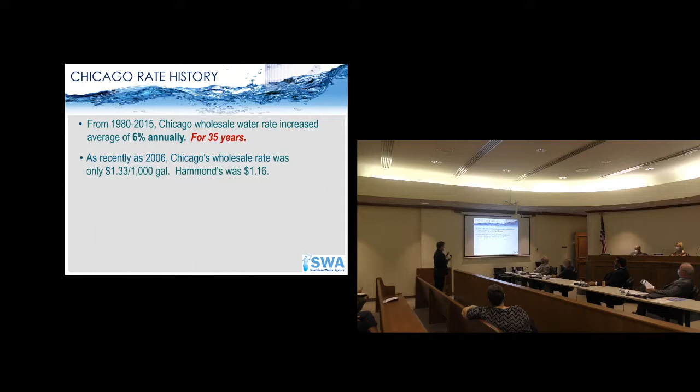For a 35-year period, Chicago's rates increased an average of 6% per year from 1980 to 2015. As recently as 2006, it was only $1.33. Hammond's was only $1.16 at that time per 1,000 gallons. Chicago's rates, in fact, just increased again yesterday. As of June 1st, they are now $4.08. So they've more than tripled in the last 14 years.

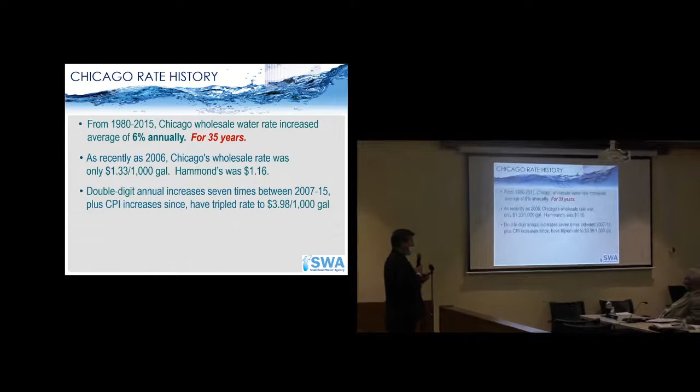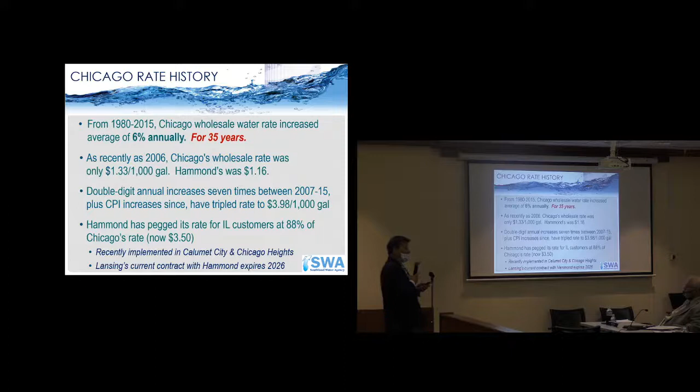Hammond has very publicly pegged its rate arbitrarily to 88% of Chicago's rate. Now Lansing, by virtue of your existing contract, which I believe has been in place since 2006, has got a lower rate structure than that. However, Hammond's practice has been over the past several years with both Chicago Heights and Calumet City to increase the rate dramatically all at once to match 88% of Chicago.

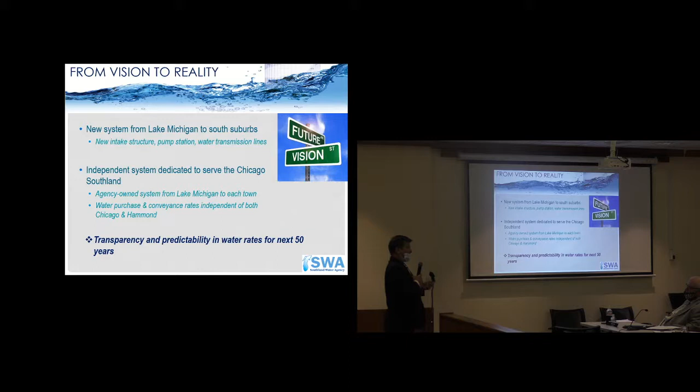Your current contract expires in 2026. As Mayor DeGraff indicated, we're looking to build a completely independent system. It would be a brand new system from Lake Michigan all the way to the Illinois state line. Somewhere on the Illinois side, we would build a water treatment facility and distribute all the finished water to Illinois communities. Everything would be completely independent of Chicago, completely independent of Hammond.

And the most important thing is the transparency and the predictability of water rates for the next 50 years. Don has already gone through all these details, so I'm going to just fly through this.

We have an agreement for a Lake Michigan access site. We've developed a public-private partnership with a group in Northwest Indiana that has property right on Lake Michigan. We've got a signed pre-development agreement for them to front the cost to build the line, the pumping station, and the intake — basically a $300 million investment to get the water to Illinois.

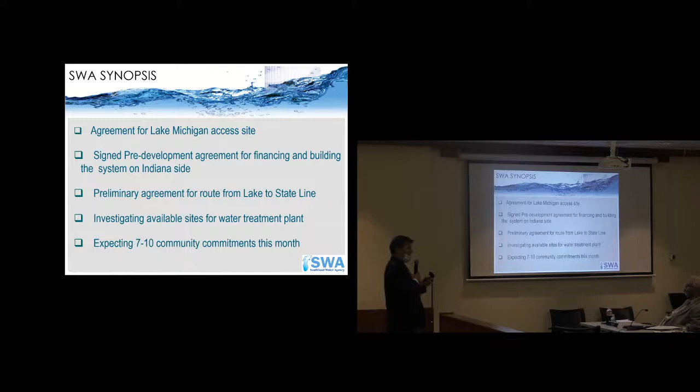We're currently investigating feasible and available sites for our water treatment facility. We do have one or two that are rising to the top of that analysis right now. As Don mentioned, we're looking at 7 to 10 other community commitments during the month of June. There are several that are already scheduled in similar meetings just as we're in right now.

The end game is that we have developed a water supply contract, and we are putting it in writing at this time that any early adopter would have initial water rates guaranteed to be at least 3% lower than what their current supplier will charge at the time that our system becomes operational, which we're estimating to be about 8 years from now, 2028. At that point, a fixed rate would be guaranteed for the first 10 years thereafter. And then, for the entire length of the 50-year water contract, they would never rise more than 2% in any given year from year 11 through year 50.

There's deep discounts available for early adopters. I'm going to get into that a little bit later. But one of the reasons that I believe the charter members, including Mayor DeGraff, are so excited about this are the potential economic development advantages, the ability to finally get a win for the Chicago Southland.

Our geography is a huge advantage. Communities in DuPage County don't have the opportunity to go all the way to the lake very easily. Even all the way up in the northwest suburbs of Schaumburg, they're beholden to however high Chicago is going to continue to increase the rates going forward. We have a golden opportunity here in the south suburbs.

What communities will be able to do at the local level is up to each individual community. The wholesale water rate will be significantly lower over time than what other communities face. Communities will have the option with their own individual rates whether to pass all of that savings on to their constituents, or maybe pass along part of it so that they're still lower than most of the areas around it, but use that gap of lower cost with additional revenue to help fund their own individual water system infrastructure for the next century.

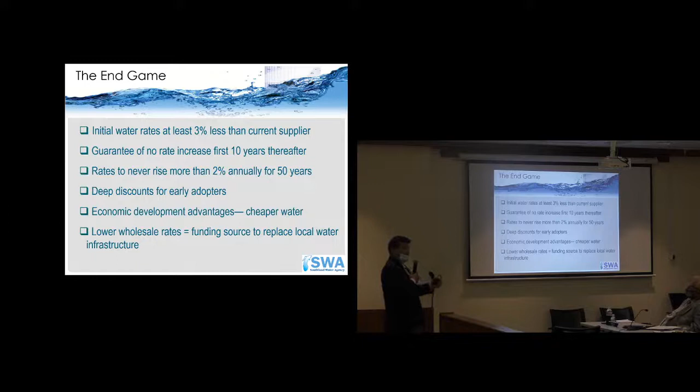In terms of a lot of the water systems approaching 60, 80, 100 years old, these systems are going to need to be replaced. This is going to be a viable funding source to do that.

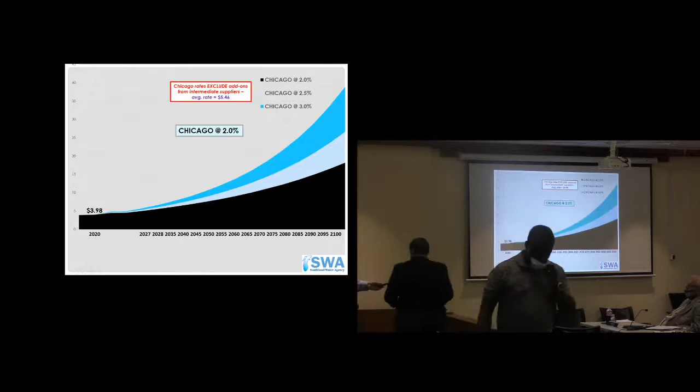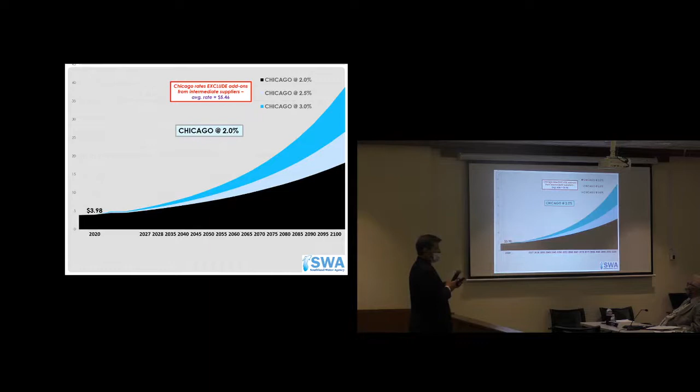398 is where we are in 2020. These graphs show the black area representing Chicago's rate going up just 2% over the next 50 years, and what those rates would turn out to be. By 2027, that'll be at 466, and it's at 408 starting yesterday. The turquoise numbers show Chicago at 3% going forward over the next several decades. We know from history it's averaged 6%, so we believe this is an extremely conservative model.

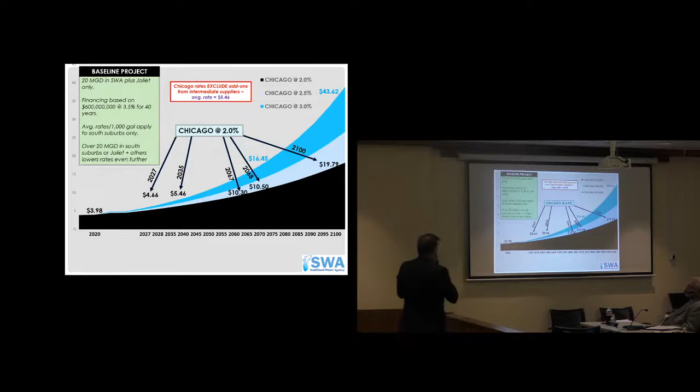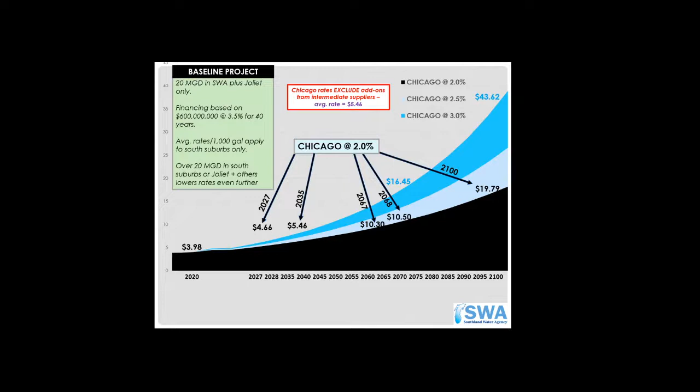Just from a baseline project, looking at this from a regional standpoint, we were able to get enough communities to reach a threshold of 20 million gallons per day in the south suburbs. We believe that's enough to allow us to partner with Joliet, which is also looking at building a brand new system for Lake Michigan water, saving even further. So we're looking at a baseline project based on $600 million. If that occurs over a 40-year financing period, the numbers in red show how much lower these numbers will be over time, particularly once the 40-year financing is paid off.

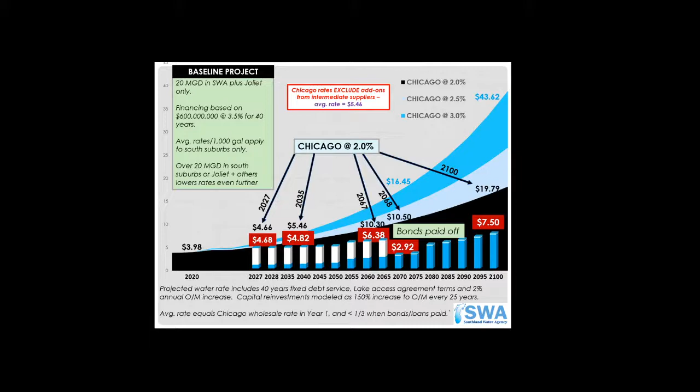There are numerous communities that aren't situated quite as close to the lake or to the direct supply—communities like Country Club Hills or Matteson, who buy their water from Oak Lawn, who buys it from Chicago. By the time it gets all the way down to them, they're paying nearly $6 per thousand today. Overall, in the Chicago suburbs, the average wholesale rate today is $5.46. We know, on average, we're going to be significantly lower than that.

This is the target markets we're looking at. We've got some color coding here because over time, communities have been grouped in different ways, partly dealing with who their current water suppliers are and how it's set up. But there's a target market here of at least 50 or 60 million gallons a day just here in the Southland.

The newest thing that's happened over these last 2 or 3 years—I'm not sure how many followed what's going on in Joliet—but they are still on well water out there, along with many of the communities that surround Joliet. The aquifer is drying up, and the Illinois State Water Survey has determined that by the year 2030, only 10 years from now, they will not have enough water to meet their peak demand from that aquifer. They and many of the other high-growth communities around there face the same issue.

So Joliet embarked on a $1 million engineering study over the last couple of years. Just at the first of this year, their city council decided they're going to go to Lake Michigan water after looking at the Kankakee River and other options. Joliet alone projects to 24 million gallons a day during the design timeframe they're looking at.

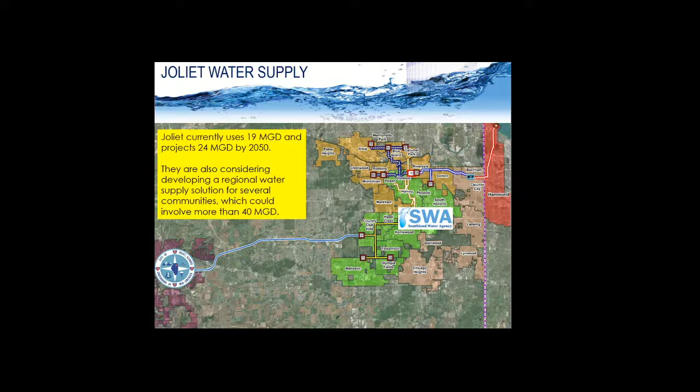By partnering with them, the infrastructure it would take to get at least part of the way there could be shared by that many more municipalities, creating an amazing economy of scale for both the south suburbs and Joliet, along with whoever else they may partner with out here.

As I mentioned, we've got an executed pre-development contract with a group in Indiana. In fact, we've got our status meeting with them tomorrow morning. We'll be meeting with them for a couple hours.

The agency has executed a contract with Robinson to move forward with a facilities planning report, which is going to be used for a funding application later this summer. We're also partnered with a couple other engineering firms that are much larger than Robinson as part of this effort. And we also have a water supply contract that I believe we handed out last week in the board packets that communities are considering at this time.

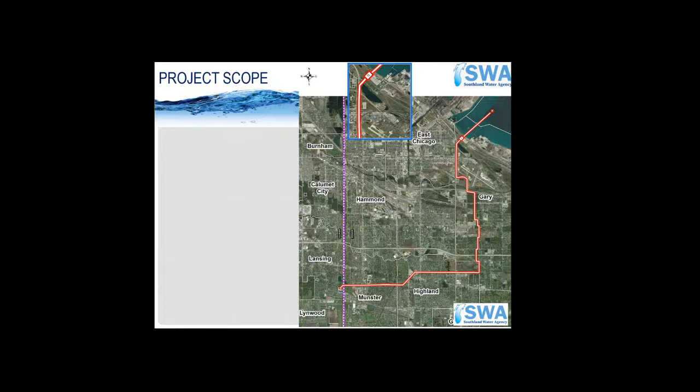Ultimately, the route would start near Buffington Harbor, which is where the Majestic Star Casino currently is in Gary. That casino site is going to be no longer at that location. They're building the land-based site off the Borman Expressway. So by this time next year, the riverboat that's there won't be there.

We've got a deal that allows us a 3-acre parcel in which to build a pump station. We've got a 99-year lease for that deal, with all of the terms essentially worked out already. There would be an intake into the lake about 2 miles into the lake, drawing the water to this big pump station, and then it would go along this route. We've got the route, and basically have City of Gary approvals on the preliminary route.

So we keep hitting the wrong button, I'm sorry.

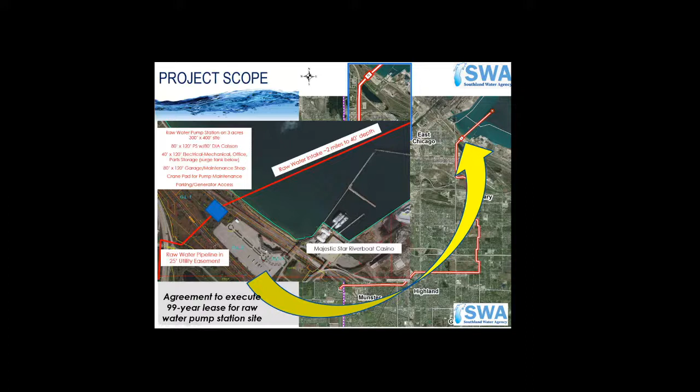There we go. And ultimately get it to the state line, which may very well end up right here in Lansing, depending on how the final engineering works out.

So from a schedule standpoint, this year we're basically working on getting all of the contractual agreements in place with Southern Cook County customers. We're negotiating with Joliet. In fact, we've got a meeting with them coming up again in about 2 weeks. We're going to be finalizing project scope and facilities planning report, funding applications, and ultimately identifying all property acquisitions that are going to be needed.

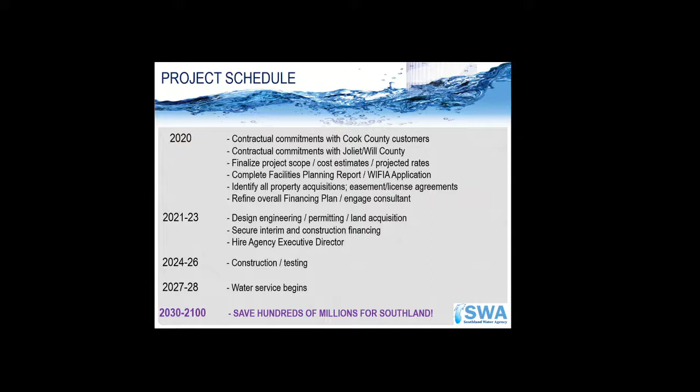Design engineering, permitting, and land acquisition is planned for 21 through 23, as well as hiring an executive director for the agency. Construction and testing are envisioned between 24 and 26. Water service would begin between 27 and 28. That's the tentative plan. And then over the next 70 years, the plan is to literally save hundreds of millions of dollars collectively for the Chicago Southland.

I mentioned earlier, Indiana Infrastructure is committed to finance the construction to the state line. At that point, we'll have a contract where the agency will then purchase the infrastructure from that group. When this is all said and done, the Southland Water Agency will own all of the infrastructure assets, which gives us complete independence, again, from Hammond or from Chicago or whoever else.

We're going to be pursuing a low interest WIFIA loan from the US EPA. This is a relatively new program, but it's geared toward large scale regional projects like this. We know that, in fact, Joliet applied a year ago and they were approved back in November to take the next step with their program. So we know that the project itself has enough merit where we believe our agency will be successful as well.

We're also going to pursue low-interest IEPA loans, which many of you are familiar with already. And there may also be other agency revenue bonds, private investors, as the whole project scope gets finalized. The exact water rates for communities aren't known today, other than we know we can make the guarantees in the contract as it relates to the current water rate systems. When the project is finally scoped and we have bids, we'll be able to calculate the exact rates. But we will guarantee, like I said, from day one, the rates will be lower than your current supplier, along with the 10-year rate guarantee.

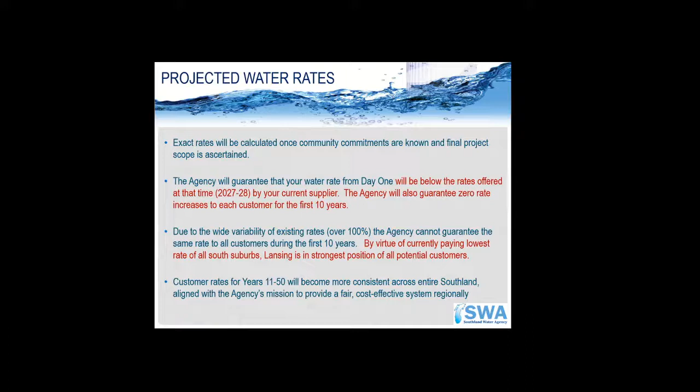Lansing, I mentioned this earlier, you actually have the strongest position of all the south suburbs because you currently pay the lowest rate. You will have, if you were to be at least engaged with the agency at that time, leverage if and when Hammond is going to look to charge 88% of Chicago's rate 6 years from now when your contract is up. Maybe Hammond will make you an offer you can't refuse. We don't know yet, but we do believe that the agency provides an incredibly strong insurance policy for when that time comes. But the long-term benefit is still the real key to this agency, the guarantee of long-term rates.

And the reason it works is for the first 40 years, 3/4 of the agency rate will be debt service. It's going to be fixed, or basically fixed. The O&M costs that are subject to CPI on an annual basis are really only going to be about 20 to 25% of our rate. So instead of every year going up 2% on $4, we're going to go up 2% on $1. And over time, that's why that graph looks the way it does. That net savings in between, when you pump millions of gallons of water each day, makes a gigantic difference in dollars and cents.

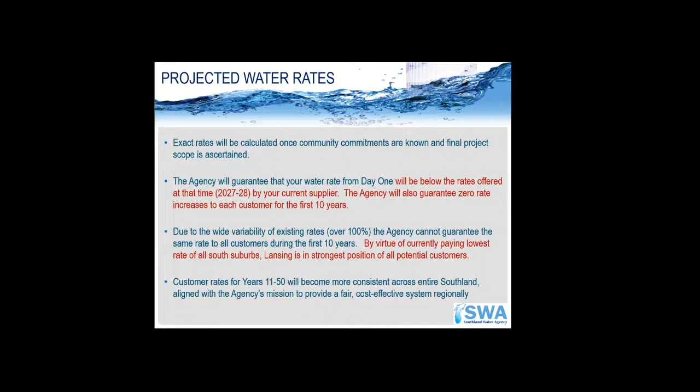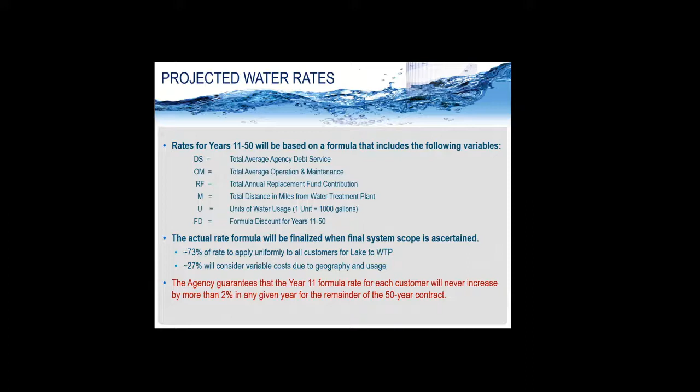This is probably too much detail, but we informed everyone that years 11 through 50 will be based on a formula that will be determined, probably by this time next year.

As far as entering the agency, there are two requirements communities must meet to join. One is an executed water supply contract. The agency, in order to finance the project, requires take-or-pay water supply contracts from enough customers so that funding agencies will know there will be sufficient revenues to pay down the debt.

We also have a fee structure, approved by the agency board back in December, with a base fee of $150,000 per MGD (million gallons a day) of a community's water allocation. That number will go up after this year due to moving forward and the additional risk the agency takes on to oversize facilities for communities not yet committed.

But we are offering incredible early adopter savings. Before July 1st of this year, that fee is only $50,000 per MGD. After July 1st, or once we reach the threshold of 20 million gallons, it goes up to $100,000. That can be paid over a 3-year period: 50% in year 1 and 25% in each of the following 2 years. This is really to offset a lot of the soft costs the agency has to undergo over the next 4 years to bring the project to fruition.

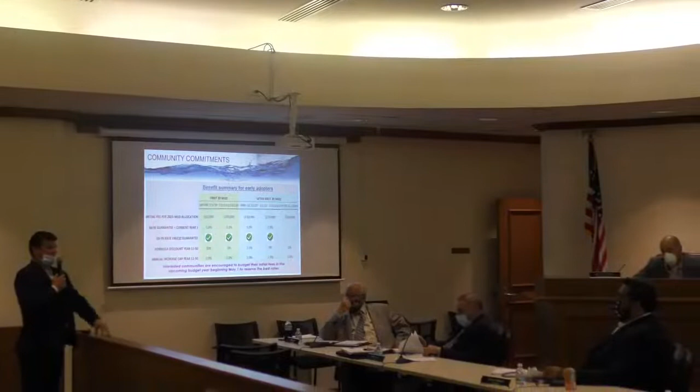Aaron, you want to address that a little bit? It would essentially be both. It would be the water supply contract - that's really what the agency is looking to accumulate to put its financing into place, as well as the initial application fee, which would be the $181,000.

Here's the thing though, with the water supply contract, we know, and we're very confident, that honoring everything that's in that contract for the next 50 years, based on Hammond's projected rate that they're going to be charging Cal City and Chicago Heights, we will be there. We'll be able to do that.

Now, if somehow within the next 5 or 6 years, Lansing gets a sweetheart deal from Hammond to the point where your rate is so low that the agency can't meet the terms of that contract, well then Lansing would be under no obligation to take the water from the agency. That's a little bit of a risk to the agency if you end up with a real sweetheart deal. But that's where, again, I think Lansing's in the catbird seat in order to strike the best deal that you can in either case.

Aaron, I've reviewed the information and obviously taken this in for the first time in a presentation. What we're talking about is really a historic type of change or option for change for our village. I have the utmost respect for Mayor DeGraff, who's still on the air listening. All right, so it becomes kind of a relationship-based thing, like who do you put your trust in for how you're going to get your water for your village. I'd just ask you to talk a little bit about yourself and your experience in these matters.